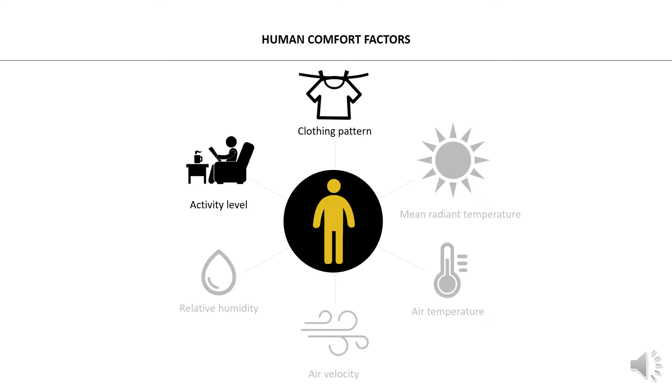Referring to the theory of comfort, there are 6 factors shaping human comfort. They include 2 personal parameters and 4 physical variables. Amongst them, air temperature has a dominant effect.

Numerous comfort studies have indicated the influence of contextual factors of building, cooling, people, and climate type on human thermal perceptions. A group of field studies were conducted in hot humid climates where high temperature and high humidity cause discomfort. In that context, enhancing air movement is an effective strategy to retain comfort by increasing the rate of convective and evaporative heat losses from the body as a mechanism of physiological cooling.

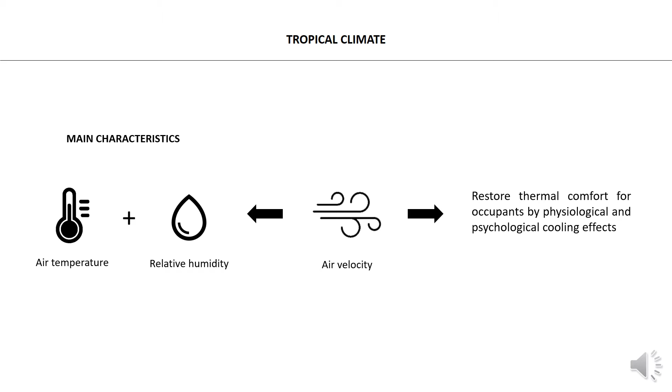4 research gaps were found, especially the role of air velocity on thermal comfort and the relationship between air movement and thermal acceptability in free-running buildings of warm humid climates, which have been studied insufficiently.

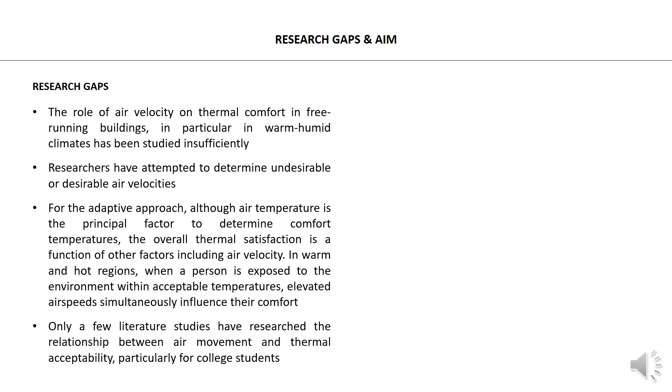This paper has been inspired by the above issues and an interest in the influences of context on human comfort perception. The work aims to understand the simultaneous correlation between airflow and thermal sensation, preference, and acceptability in naturally ventilated residences in Vietnam's hot humid climate, addressing the airflow conditions for occupant thermal satisfaction derived from a combination of 2 variables: temperature and airspeed.

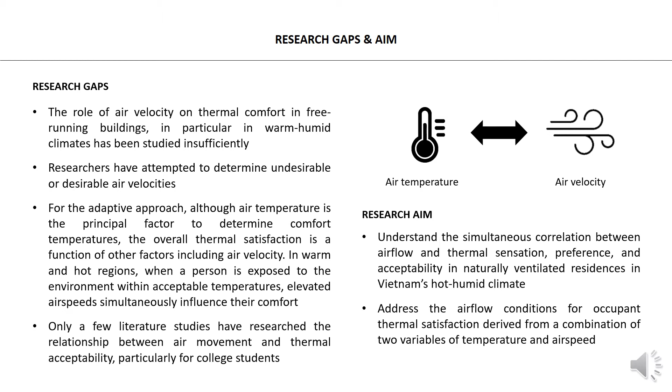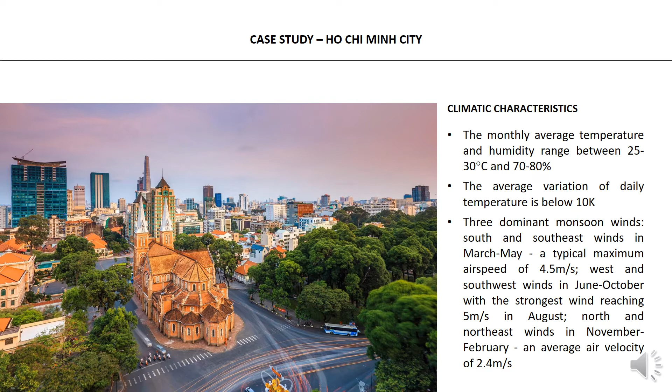The context of this study is Ho Chi Minh City, the most populous city in Vietnam. Dominant climatic features in the tropics are high temperatures and high humidity uniformly. There are 3 dominant monsoon winds flowing around the city in different directions and in different months.

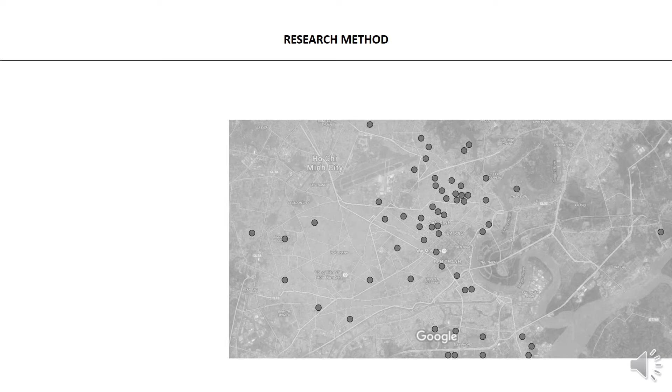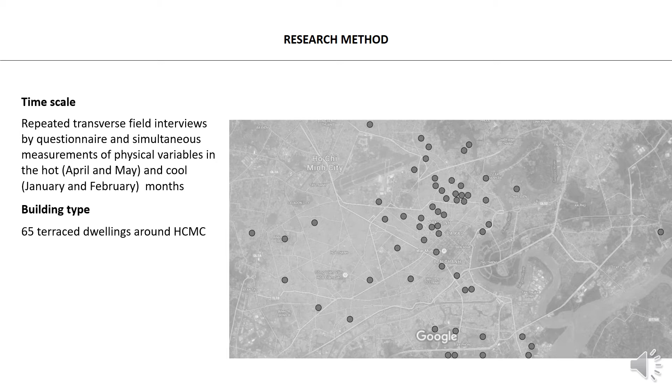The main research method was repeated transverse field surveys by questionnaire and simultaneous measurements of physical variables. 65 terrace dwellings around the city were revisited in summer 2017 and spring 2018. Residences were naturally ventilated along with the use of air conditioner at certain times on hot days.

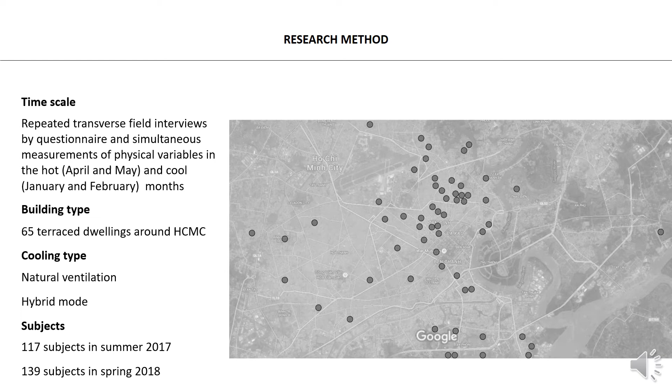A total of 256 datasets were collected. The snapshot measurements of climate around the houses were taken in warm and cool months in Ho Chi Minh City. The average temperature over those periods was 33 and 30 degrees Celsius respectively.

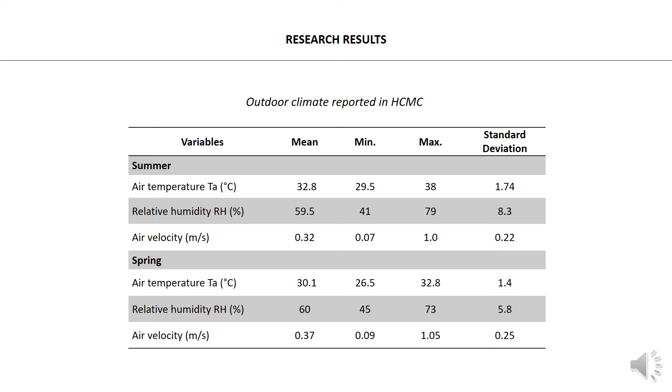Personal information related to gender, age, weight, clothing pattern, and activity level was recorded.

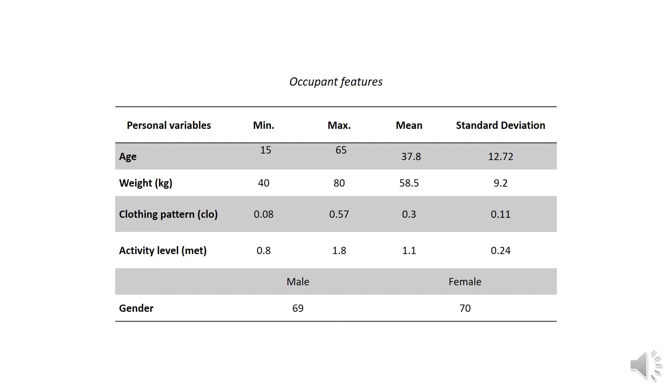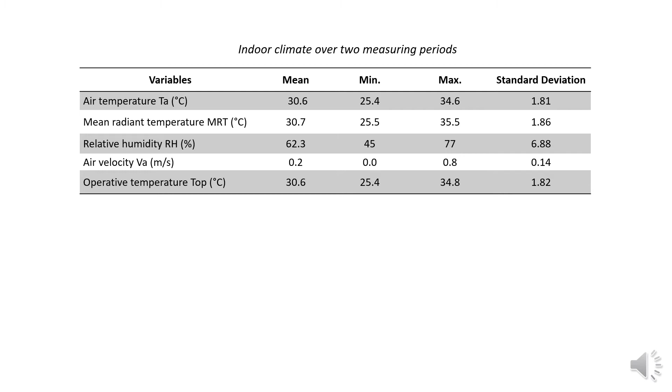256 datasets of indoor climates reported are shown in the table. The mean air and operative temperature were similar, around 30.6 degrees Celsius, explaining a warm condition. Relative humidity fluctuated within 45 and 77%. The airflow inside the houses was calm during the investigations, with a mean value of 0.2 meter per second, ranging between 0 and 0.8 meter per second.

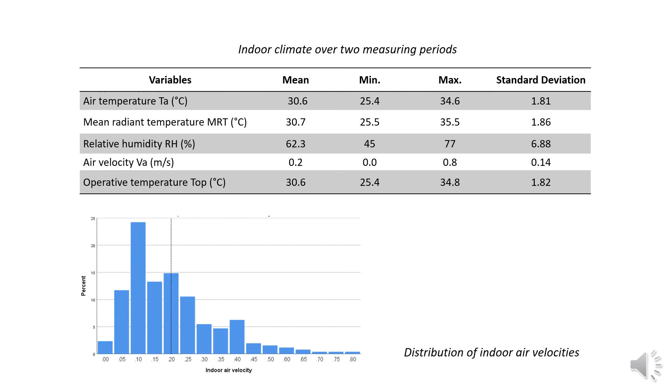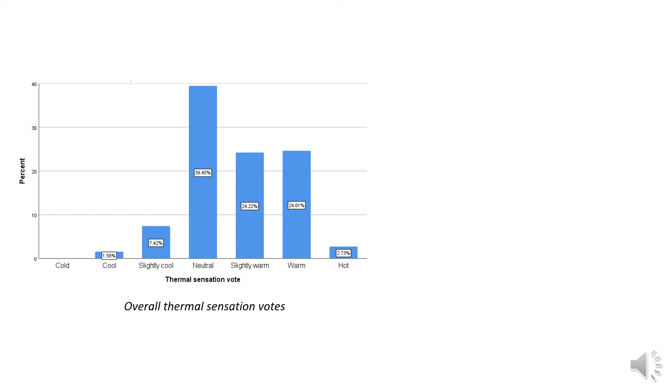Occupant thermal perception indoors in the different seasons are summarized in the left figure. Approximately 40% of respondents registered their sensation as thermal neutrality.

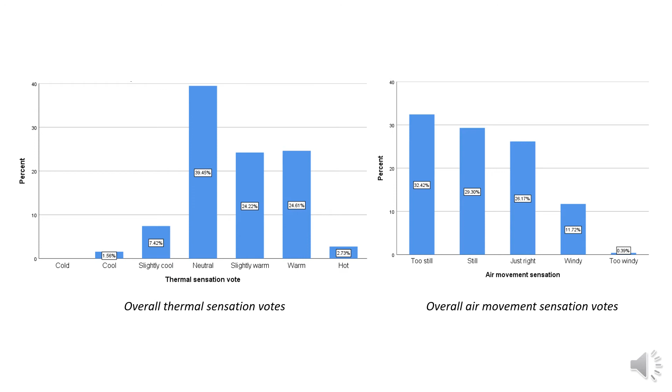Alongside replying to the questionnaire of thermal cognition, people recorded their air movement sensations. Air movement sensations depend on not only airspeed but air temperatures and personal variables. The majority of respondents reported conditions as still.

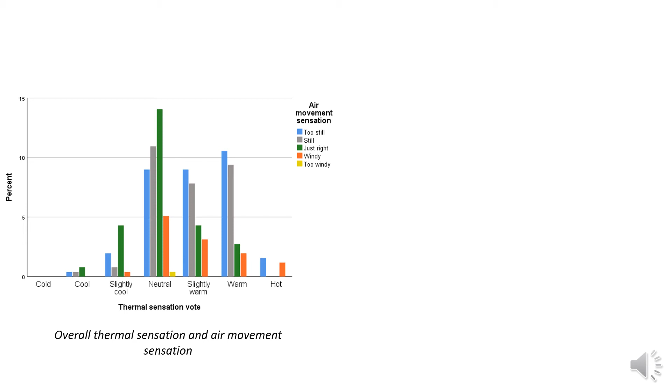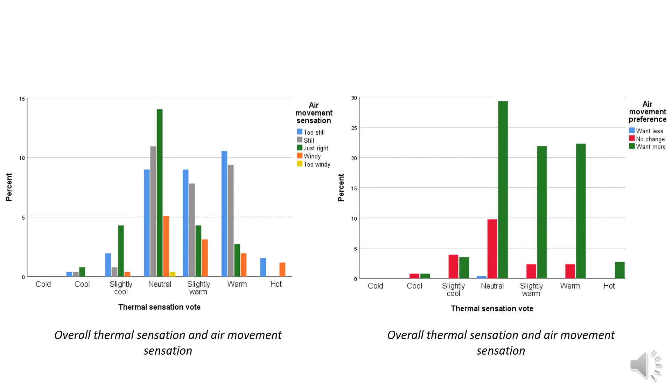There was a positive correlation of warm climate and poor natural ventilation that resulted in discomfort, particularly in hot summer. The right chart shows the correlation between thermal sensation and air movement preferences. Over 80% of respondents asked for more airflow across all thermal scales.

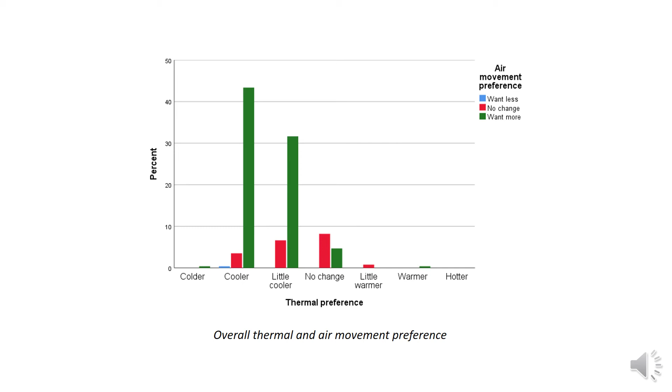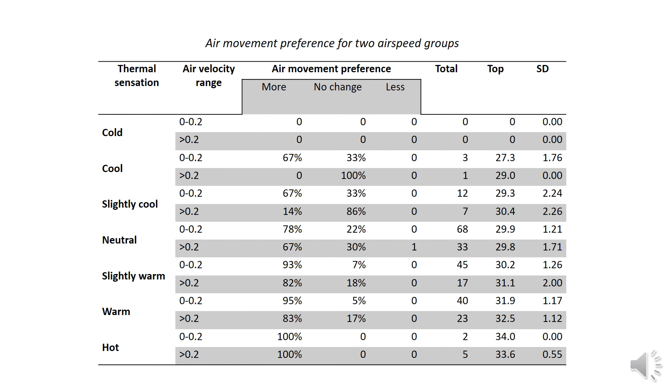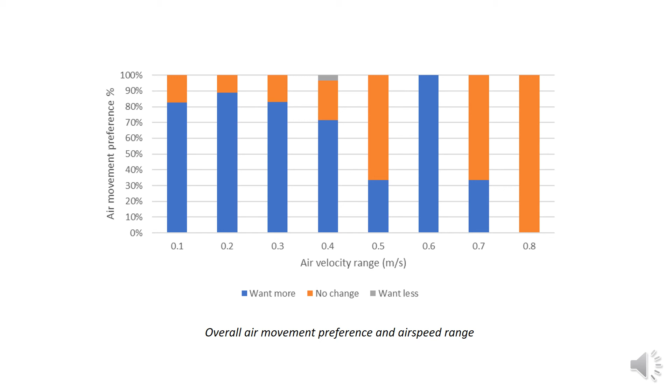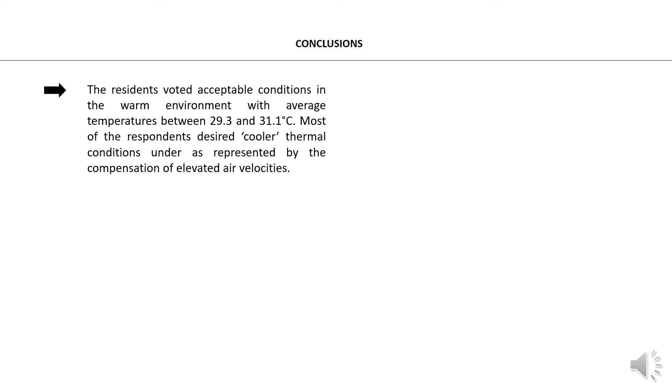Six conclusions were found from the study. The residents voted acceptable conditions in the warm environment with average temperatures between 29.3 and 31.1 degrees Celsius. The real airflow data collected in the dwellings in Ho Chi Minh City indicated relatively calm conditions that were inadequate to restore the thermal comfort of occupants.

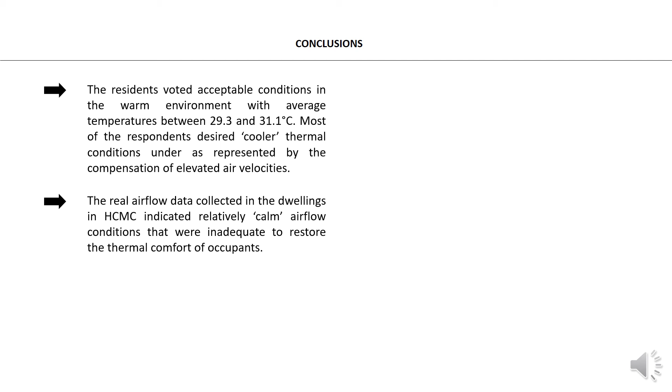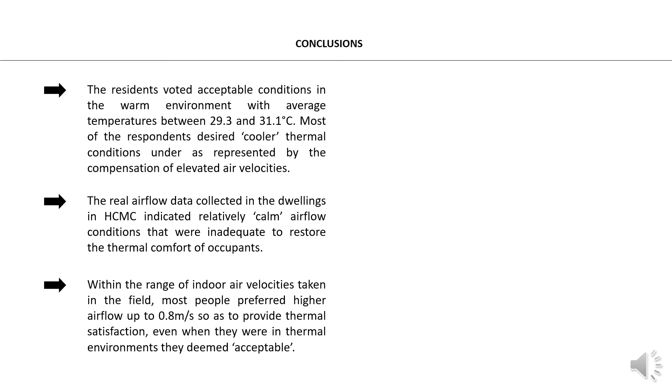Most people prefer higher airflow, up to 0.8 meter per second, to provide thermal satisfaction, even when they were in thermal environments they deemed acceptable. A close correlation between thermal and air movement acceptability of occupants was confirmed in naturally ventilated residences in Vietnam.

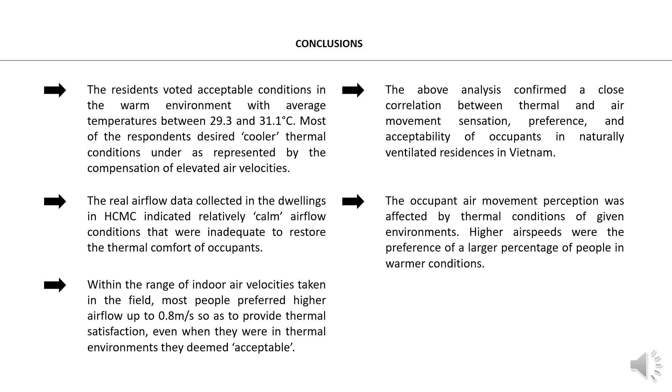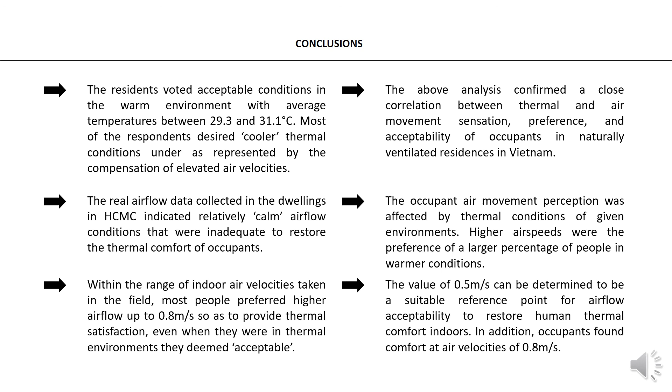The occupant air movement perception was affected by thermal conditions in given environments. Higher airspeeds were preferred by a larger percentage of people in warmer conditions. The value of 0.5 meter per second can be determined to be a suitable reference point for airflow acceptability to restore human thermal comfort indoors. In addition, occupants found comfort at air velocity of 0.8 meter per second.